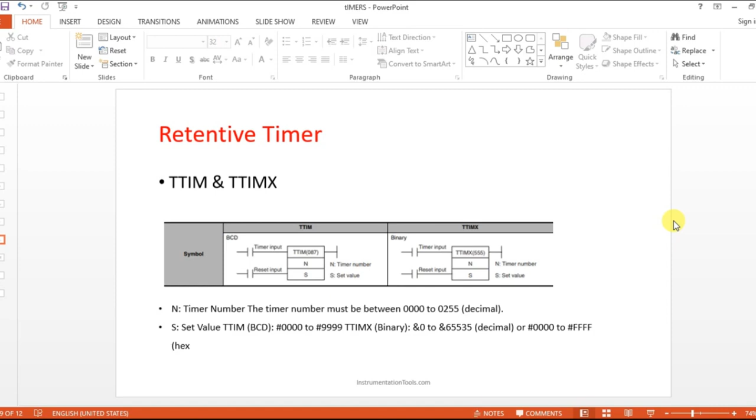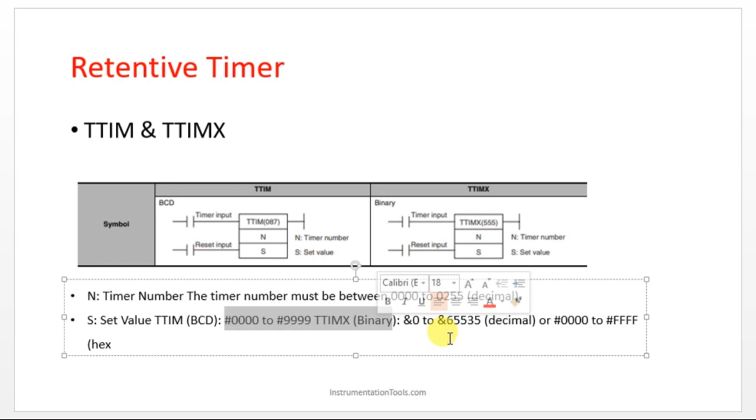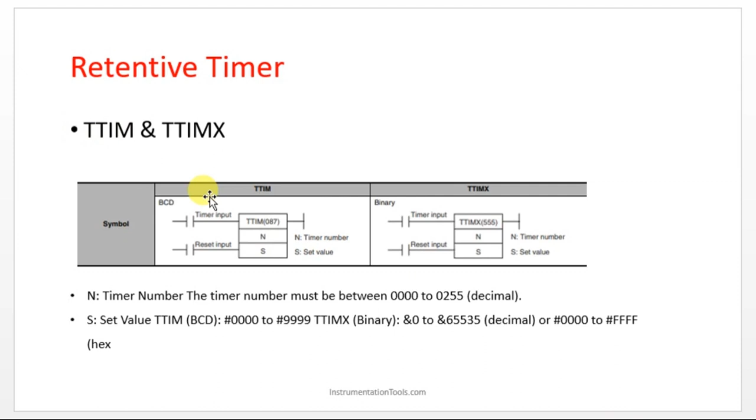In CX Programmer, we have two types of retentive timers: TTIM and TTIMX. Both work the same, but one is a BCD type timer and the other is a binary type timer. The timer number must be between certain values, and we have a set value range. For BCD this is the range, and for binary this is the range. Without any time delay, let's go to CX Programmer and see how to work with these two timers, TTIM and TTIMX.

Let's open a similar example. So I have here TTIM. This is called a totalizing timer. So retentive timers are called totalizing timers here.

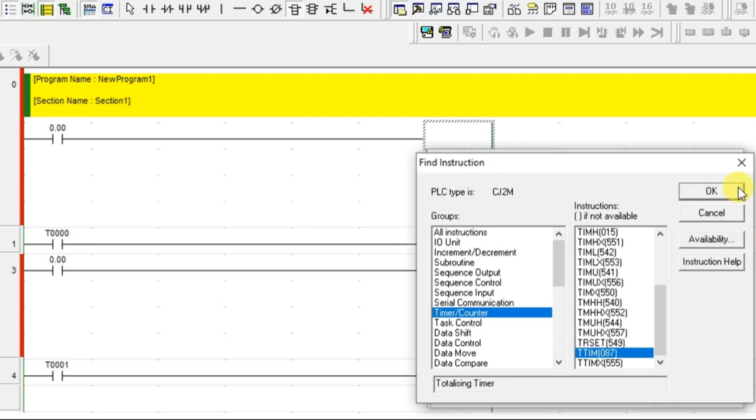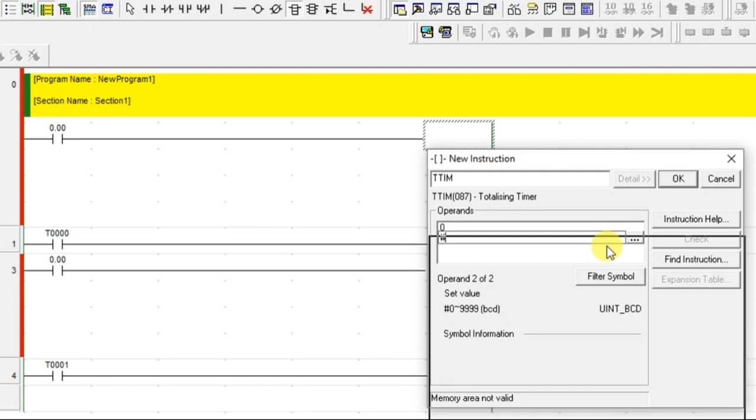Click OK and give the timer name here, 0. You can give the set value directly here, or click OK and edit it there also. I'm going to give here for this time, I'm just giving 100.

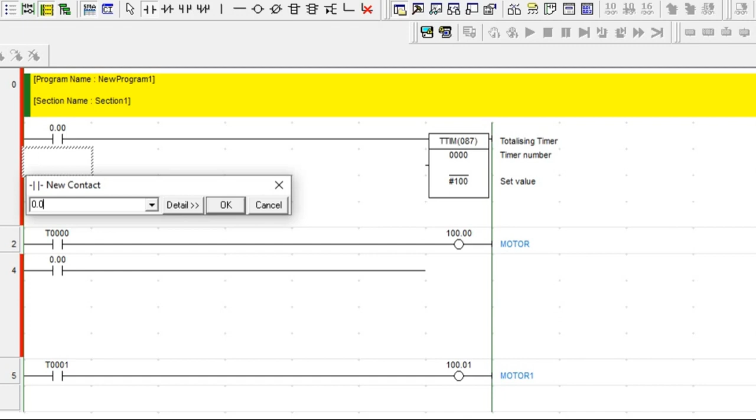Once you click on this, you get one more input here. All retentive timers are having a reset option. A timer has two inputs: one for turning on the timer and another for resetting the timer. So I'll add one more input here to reset the timer, 0.01. All retentive timers will have a reset option.

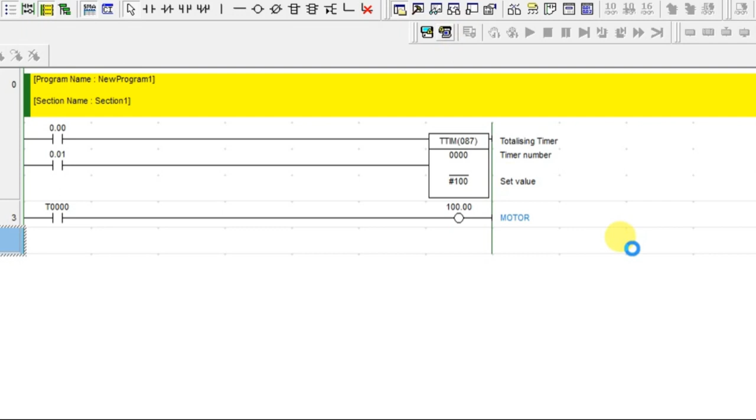So go for this, I'll edit this. Alright, so let's go online and check this BCD type first, then we will go for binary type. So let's turn on this.

After 10 seconds, your output is on. This totalizing timer is counting from low value to higher value. Why it is counting from lower value to higher value, I'll tell you. See, even though you turn off the timer input, your output is not turning off. That is a feature of totalizing timer.

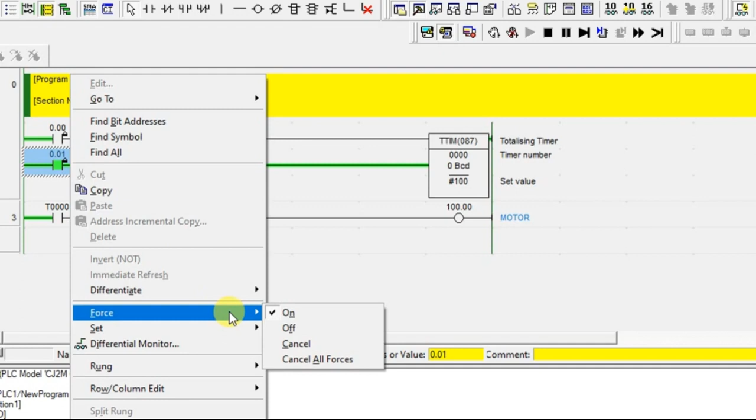So you have to use the reset option to turn off. Once you turn on the reset input, even your set value goes to 0 and your motor is also off. That's the working of retentive timer in Omron.

I'll repeat again, I'm going to turn on this. After a time delay, your output is on. So you are turning off your input.

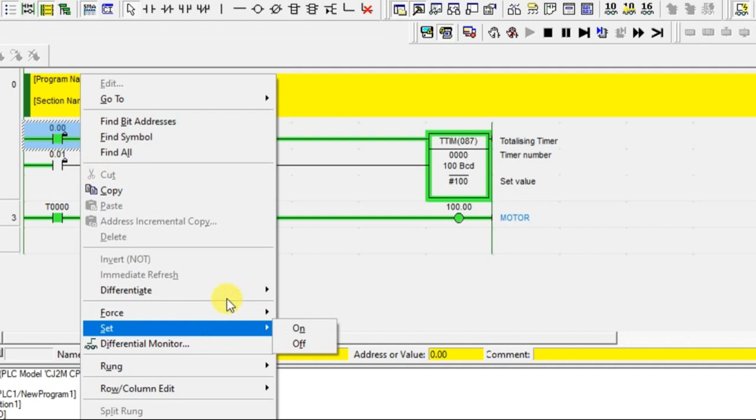In the previous session, we saw the types of timers. In those timers, if you turn off the input, your output will also go off. But in retentive type timer, the totalizing timer in CX Programmer will not work the same. You have to use one more input to reset this. It is like a set.

Once the timer is turned on, it is like a set coil, and after that you have to use the reset option to reset the timer and also your output. So I'm going to turn on this to reset. That's it, we have done the reset.

One more thing, let it be running. We'll turn off in between. So it started increasing, I'm going to turn off in between. Look at this, what is happening? Your value retains, right?

Previously, what would happen? It would go back to the original value. So now, where you got stop, it is retaining over there.

So let's turn on again. And it started running from the place where it left off. Correct? So that's what it is retaining the value. That's what it is called a retentive timer.

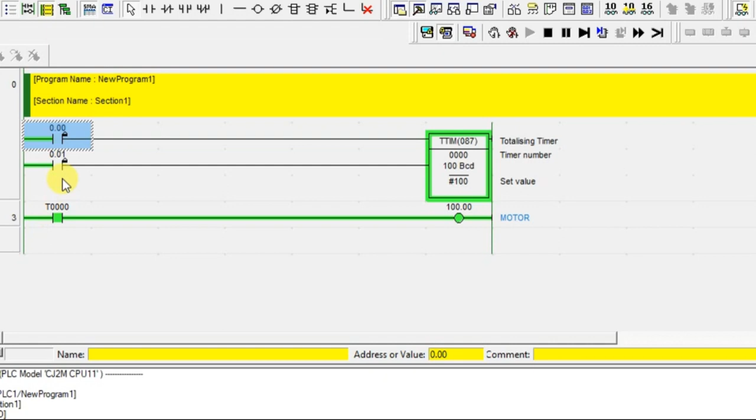So let's add that binary type also, 0.00. TTIM X timer 1, and I'm giving the value same as that. That's it.

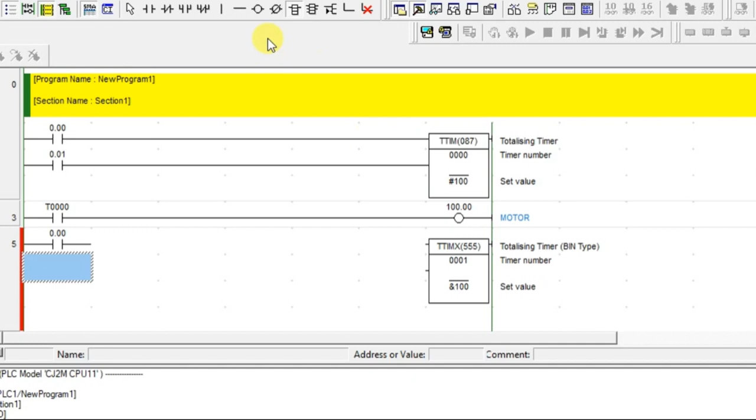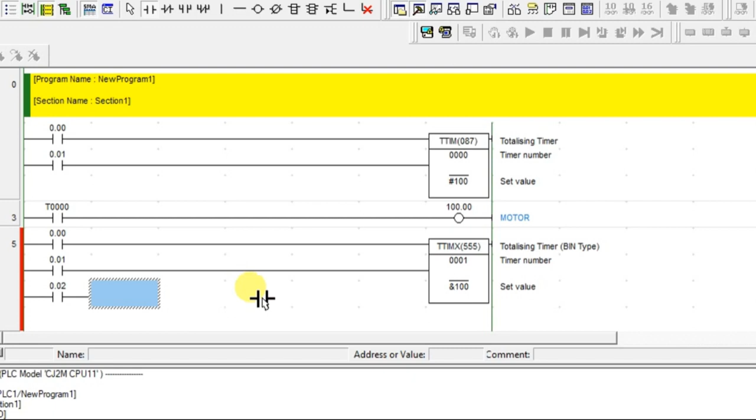This is also having 2 legs, so I'm adding the same reset coil input and connecting it. And we will have one more input to turn on an output. So it's connected, let's compile this.

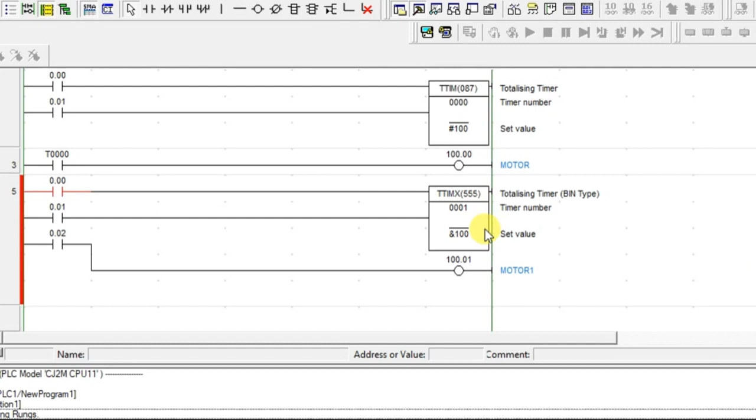So we have an error. What is this error? Look at this, overlapping rungs. In overall, if you are using a timer, that should be in one rung only, you cannot connect one more output along with this. Look at this, this is having a 0th rung and the motor is at the next rung, and this is at the second rung and this has to be in the next rung.

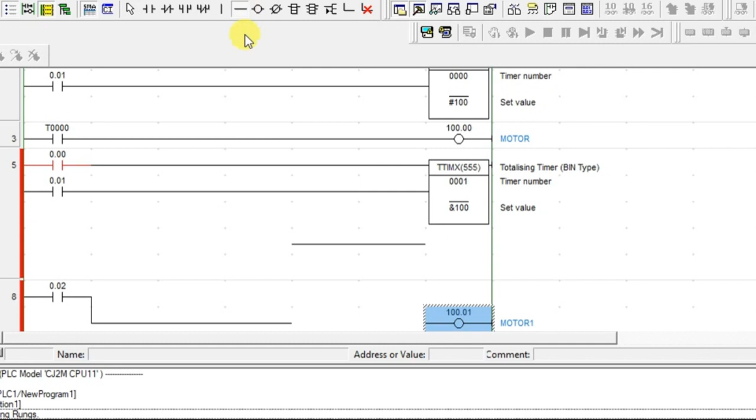So just cut and paste it in the next rung. That's it, now we'll compile. So there is no error, for online.

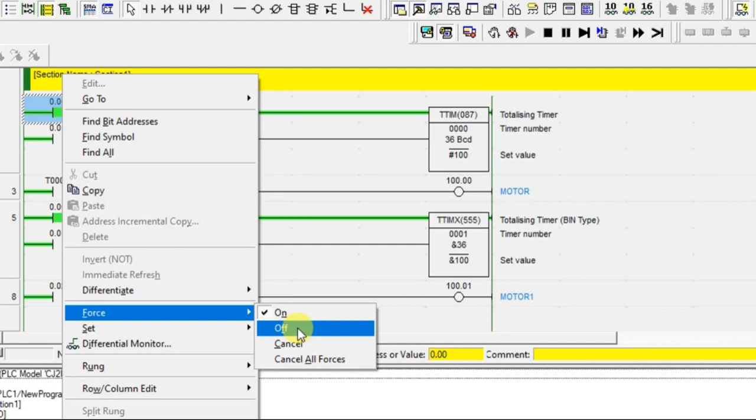Alright, so turn on. Both the timers are started running. If you turn off in between, both are holding the value. And if you turn on again, it will start from there. Once the time delay is done, it will turn on a motor. So the first timer is turning on this motor and the second timer is turning on the other motor.

See, I have not turned on this. Look at this, this output is not turned on because I have used some other input instead of using the timer number. That's why this is not turned on.

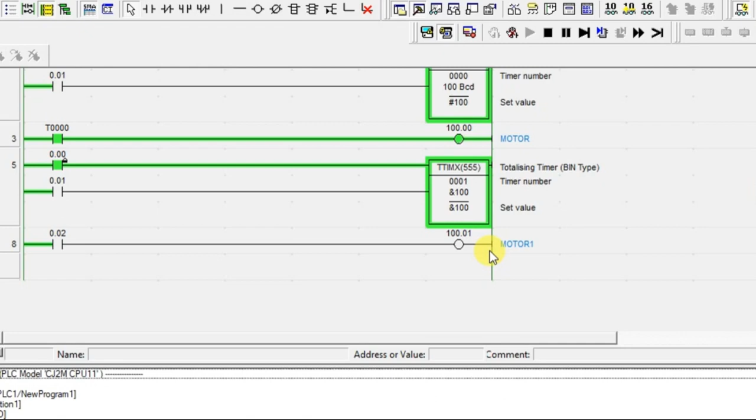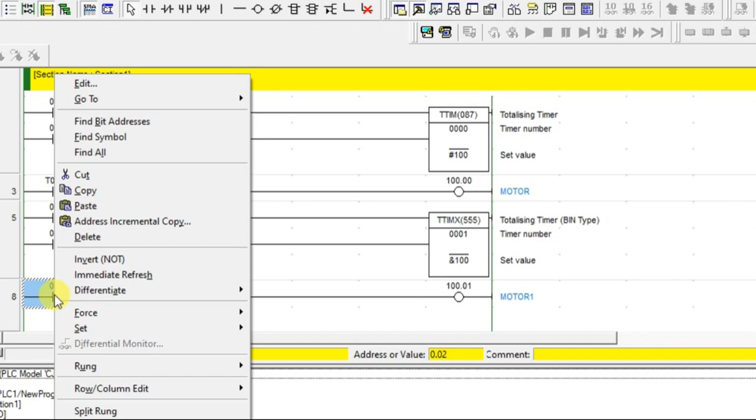So if you turn on the reset, what will happen? Your timer is getting reset. So we'll edit this one. Okay, let's run again.

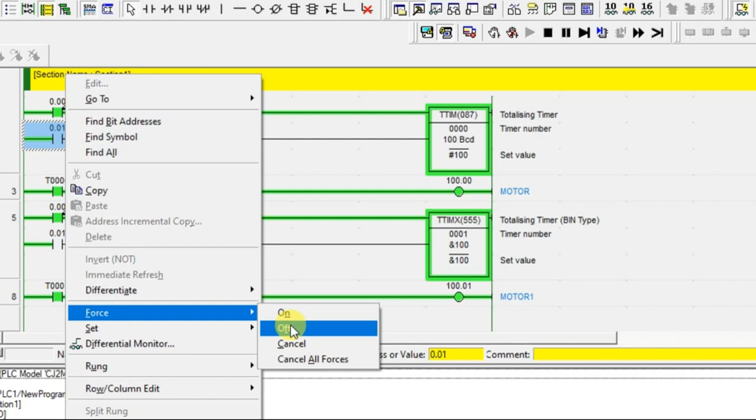Turning on, both are running. After that, motor 1 and motor both will get turned on. See, it's turned on, see now the input is on. If I reset, what will happen? It got reset, but you just turn it off.

That's it, again it will get turned on. The timer will again get turned on because your input is still in an on condition. I'll repeat again. Both the outputs are on.

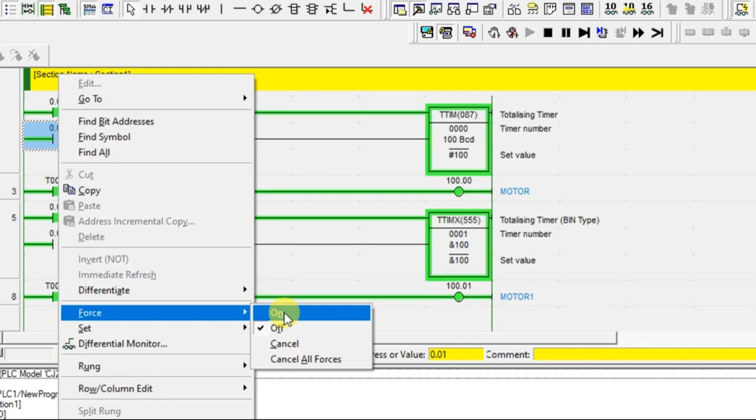So now, before turning off the input, I'm going to reset. So now the reset bit is on, so your present value is going back to the previous original value, the starting value. Now you are going to turn off your reset. Since your input is in an on condition, it started running, the timer is again started.

So this is the working of retentive timers, and all retentive timers should have a reset input. I hope you have understood the concept.